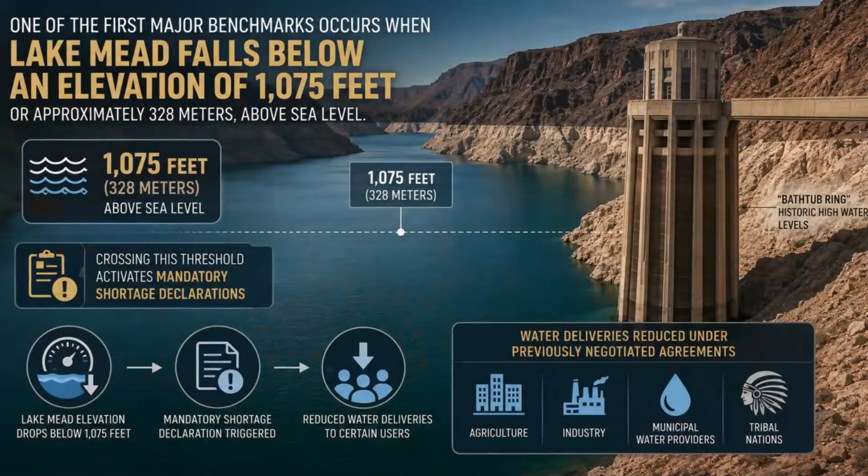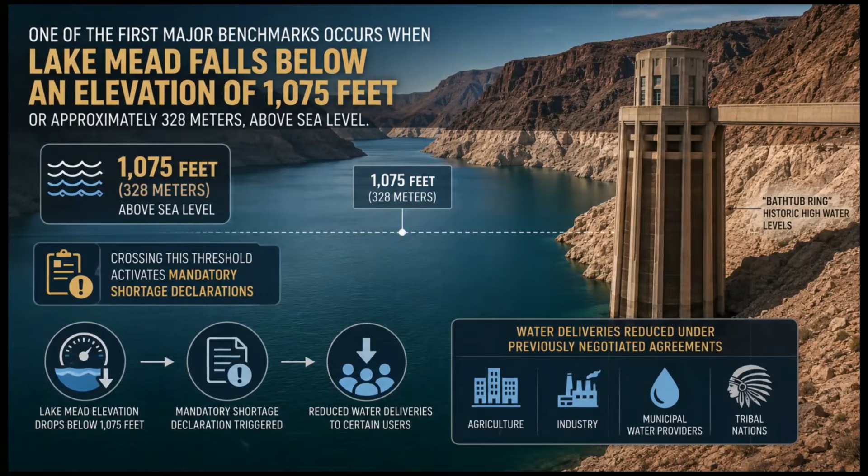Lake Mead's management revolves around specific water elevations that trigger increasingly significant operational changes. These thresholds determine when mandatory conservation measures begin, when hydroelectric production becomes less efficient, and when increasingly serious emergency planning must be implemented. One of the first major benchmarks occurs when Lake Mead falls below an elevation of 1,075 feet, or approximately 328 meters, above sea level. Crossing this threshold activates mandatory shortage declarations that reduce water deliveries to certain users under previously negotiated agreements.

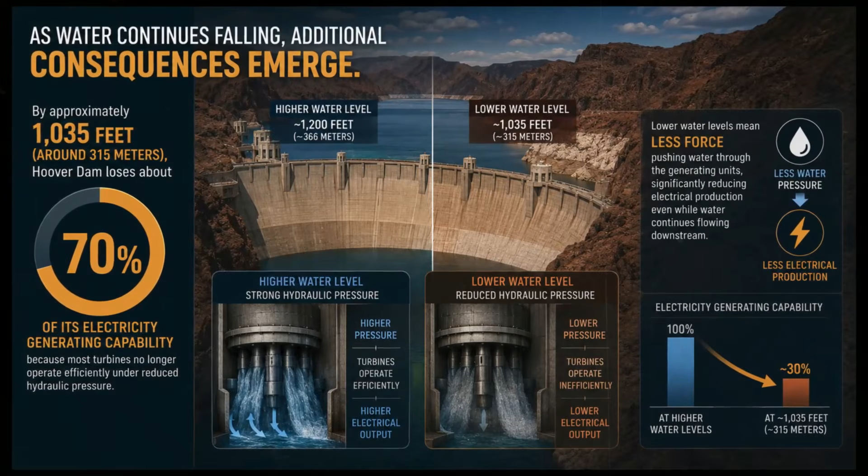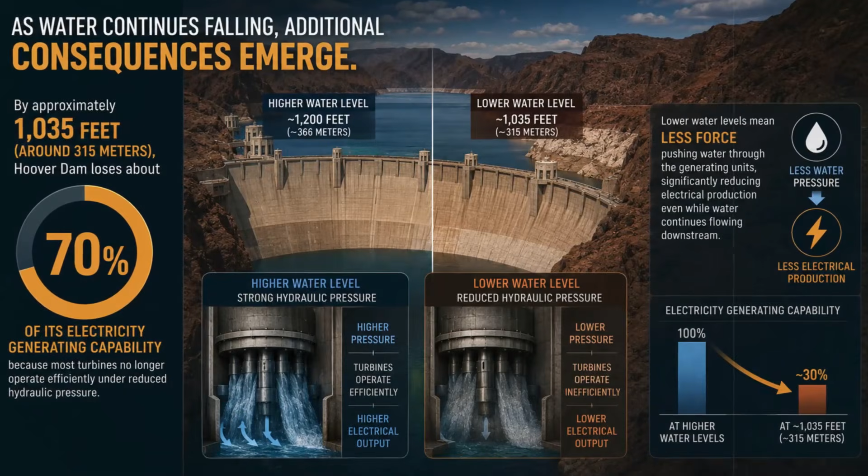As water continues falling, additional consequences emerge. By approximately 1,035 feet, or around 315 meters, Hoover Dam loses about 70% of its electricity generating capability because most turbines no longer operate efficiently under reduced hydraulic pressure. Lower water levels mean less force pushing water through the generating units, significantly reducing electrical production even while water continues flowing downstream. If the reservoir reaches approximately 950 feet, or nearly 290 meters, hydroelectric generation effectively stops. Water could still pass through the dam, but the turbines would no longer function as intended.

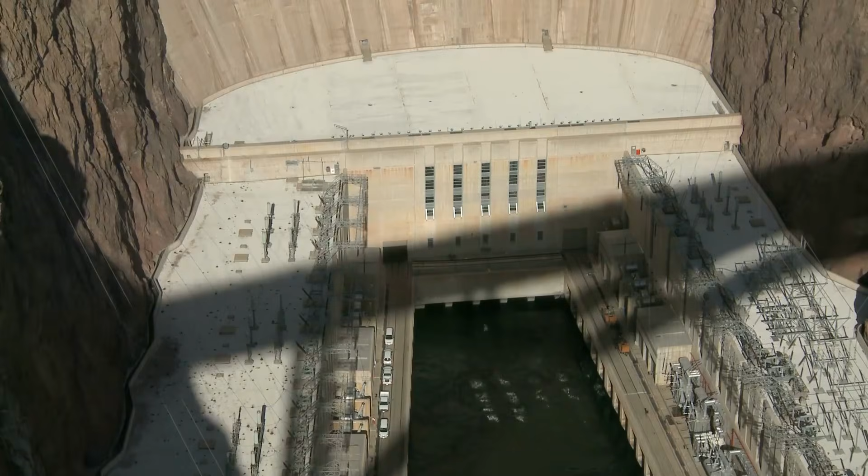An even more consequential threshold lies farther below. Dead pool occurs at approximately 895 feet, or about 273 meters, above sea level. At that elevation, water can no longer flow through Hoover Dam by gravity alone. Downstream deliveries supporting cities, farms, tribal communities, and Mexico would effectively cease unless alternative pumping systems existed. Dead pool represents one of the most closely monitored elevations in American water management because reaching it would fundamentally alter operations throughout the lower Colorado River basin. Although Lake Mead remains above that level today, recent projections illustrate why concern continues growing.

The year 2026 brought another disappointing snow season across the Rocky Mountains, where much of the Colorado River originates. Snowpack serves as the natural reservoir feeding rivers throughout spring and summer. When winter snowfall falls well below average, downstream reservoirs receive substantially less runoff during the following months. Federal water managers responded by reducing releases from Lake Powell into Lake Mead by approximately 1.48 million acre-feet. The decision aimed to preserve sufficient water behind Glen Canyon Dam, preventing equally serious operational problems farther upstream. Protecting one reservoir, however, inevitably affected the other. With reduced inflows arriving from Lake Powell, Lake Mead faced accelerated declines despite ongoing conservation efforts across multiple states.

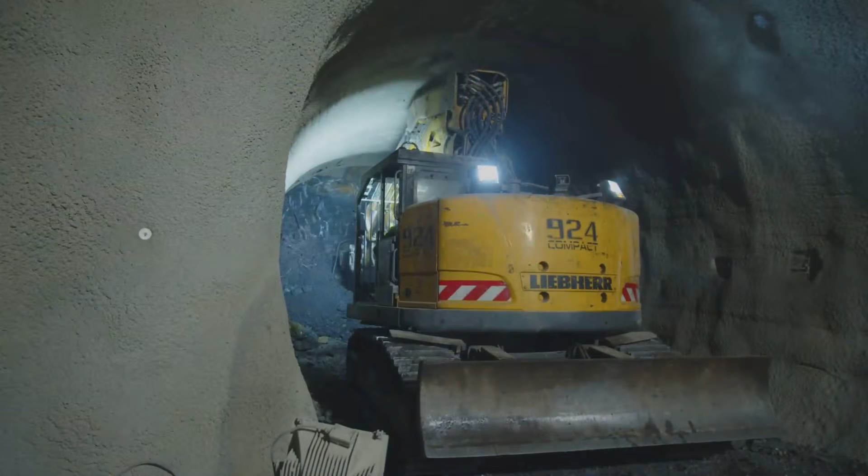For southern Nevada, they also became a direct engineering problem, requiring a solution long before the reservoir approached its lowest operating levels. Rather than waiting until water shortages became an immediate emergency, the region began preparing for conditions that once seemed almost unimaginable. The result was one of the most ambitious water infrastructure projects ever constructed beneath an existing reservoir, a project costing approximately $1.5 billion that was designed for a future in which Lake Mead continues to shrink.

Unlike many other cities drawing water from the Colorado River, Las Vegas relies on a relatively small allocation of the river's total supply. Yet nearly all of southern Nevada's drinking water comes from Lake Mead. As reservoir levels continued declining after the beginning of the 21st century, engineers recognized that the existing intake structures, which had functioned reliably for decades, were becoming increasingly vulnerable.

Water does not simply enter a city's treatment system through a pipe placed anywhere along the shoreline. Intake structures are carefully positioned at specific elevations beneath the lake so they remain submerged under expected operating conditions. As Lake Mead fell year after year, the highest intake structures gradually became exposed or approached elevations where reliable operation could no longer be guaranteed.

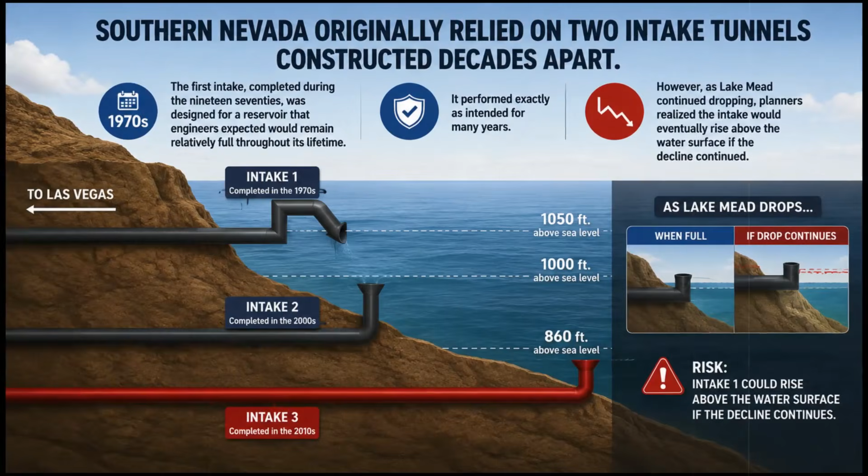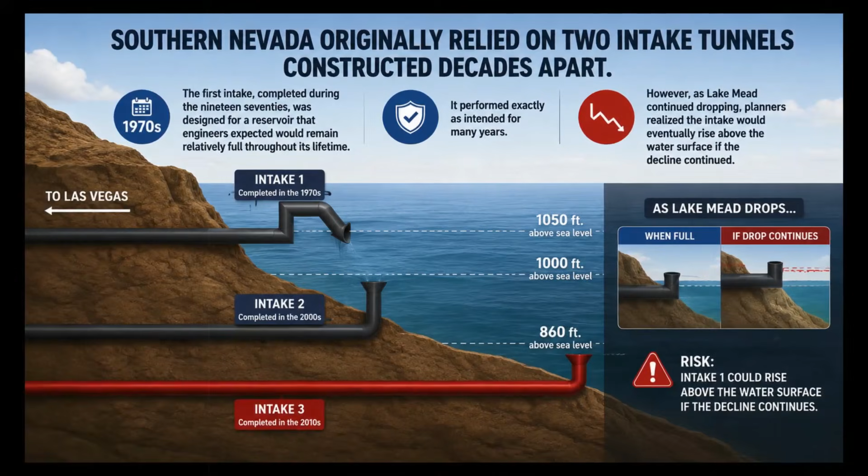Southern Nevada originally relied on two intake tunnels constructed decades apart. The first intake, completed during the 1970s, was designed for a reservoir that engineers expected would remain relatively full throughout its lifetime. It performed exactly as intended for many years. However, as Lake Mead continued dropping, planners realized the intake would eventually rise above the water surface if the decline continued. A second intake was later constructed at a lower elevation to provide additional security. While it significantly improved reliability, projections showed that prolonged drought could eventually threaten that intake as well.

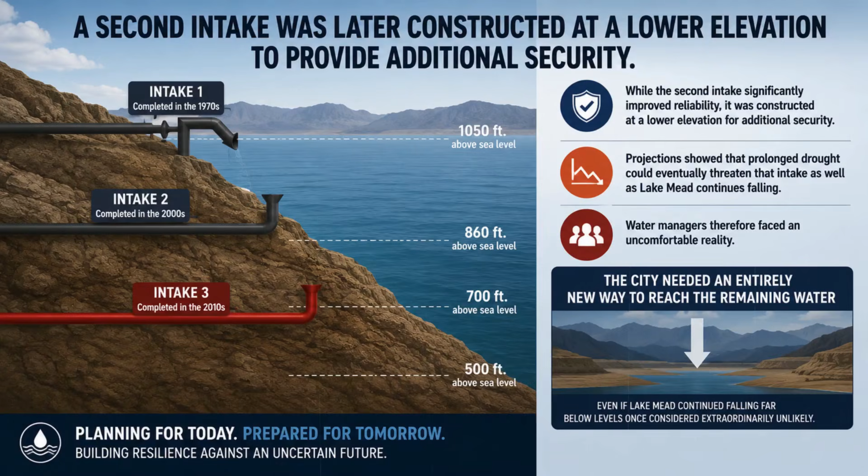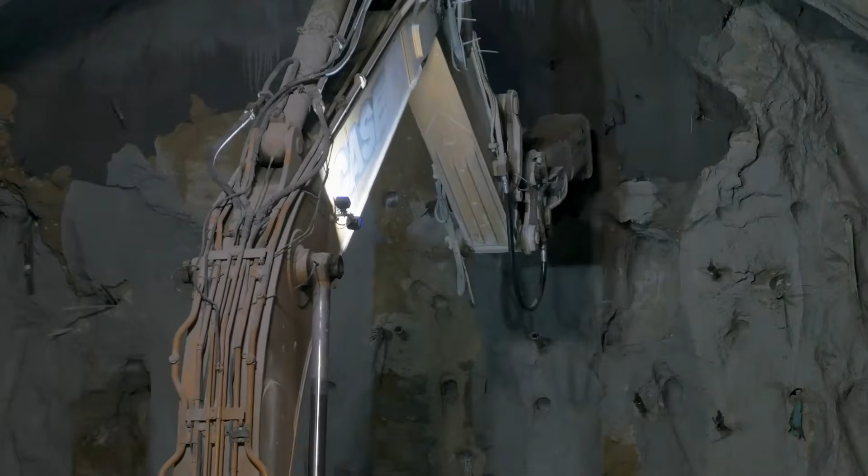Water managers therefore faced an uncomfortable reality. The city needed an entirely new way to reach the remaining water, even if Lake Mead continued falling far below levels once considered extraordinarily unlikely. The solution would require going deeper than any previous intake tunnel ever built at the reservoir. Planning alone demanded years of geological surveys, underwater mapping, drilling investigations, and structural analysis.

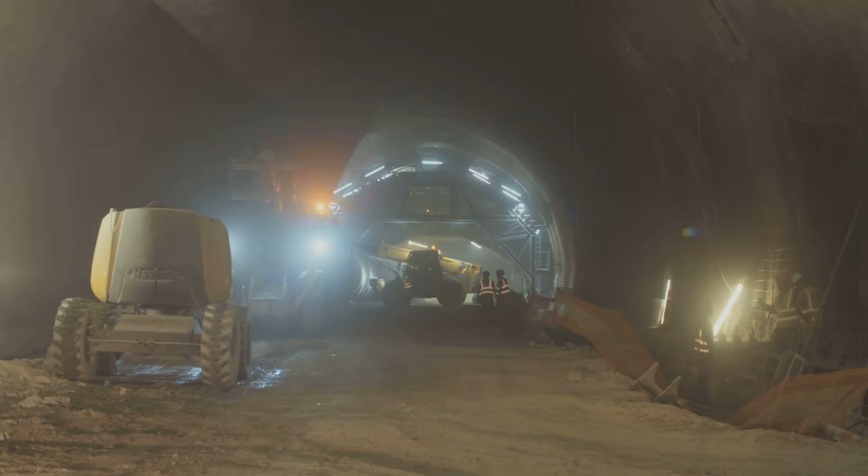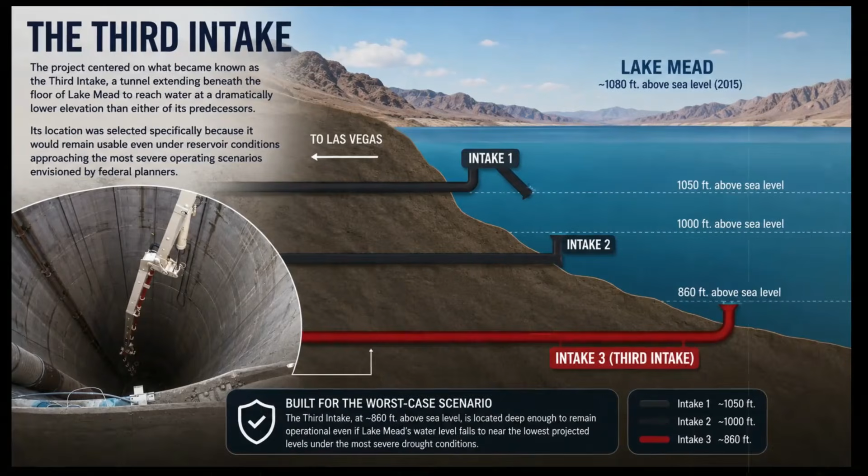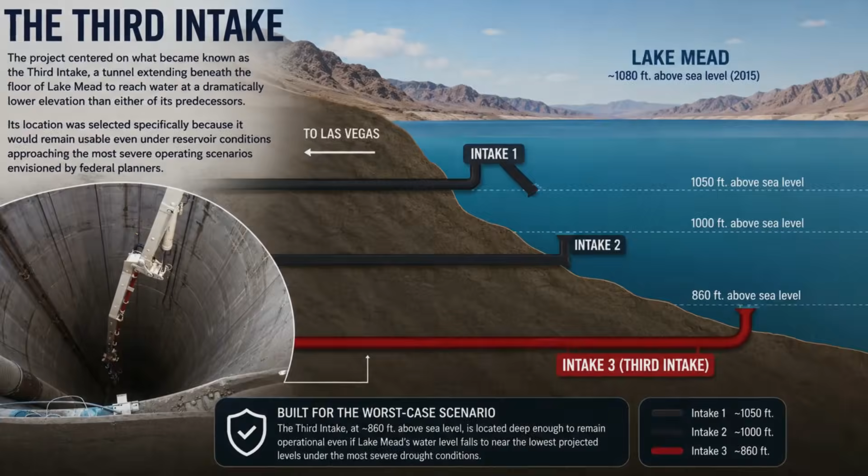Engineers were not simply installing another pipeline. They were attempting to excavate beneath one of the largest reservoirs in the United States while maintaining the integrity of Hoover Dam's surrounding geology and ensuring the existing water supply remained uninterrupted throughout construction. The project centered on what became known as the third intake, a tunnel extending beneath the floor of Lake Mead to reach water at a dramatically lower elevation than either of its predecessors. Its location was selected specifically because it would remain usable even under reservoir conditions, approaching the most severe operating scenarios envisioned by federal planners. Constructing that tunnel presented challenges unlike conventional underground excavation.

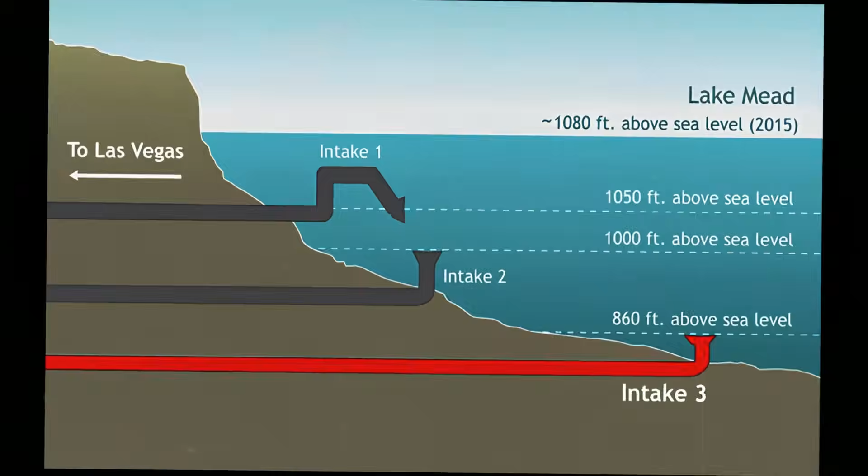Unlike tunnels driven through dry mountainsides, this one had to be excavated beneath an active reservoir containing millions of acre-feet of water, exerting enormous pressure on the surrounding rock. Any significant failure during excavation could have allowed water to enter the tunnel under tremendous force, placing workers and equipment at immediate risk. Engineers therefore relied upon one of the world's largest tunnel boring machines ever assembled for a municipal water project.

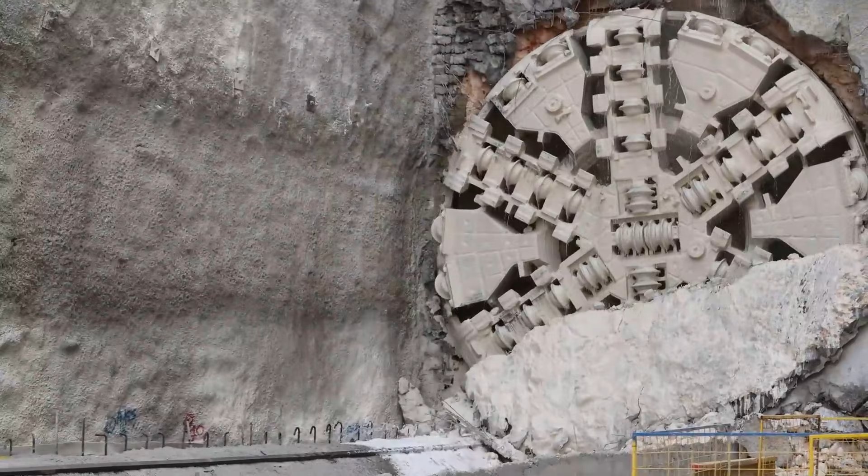The massive machine slowly advanced through extremely hard volcanic rock beneath the reservoir, cutting a circular path while simultaneously installing concrete lining segments behind it. Every forward movement required extraordinary precision because even small alignment errors could affect the tunnel's ability to connect with its final intake location.

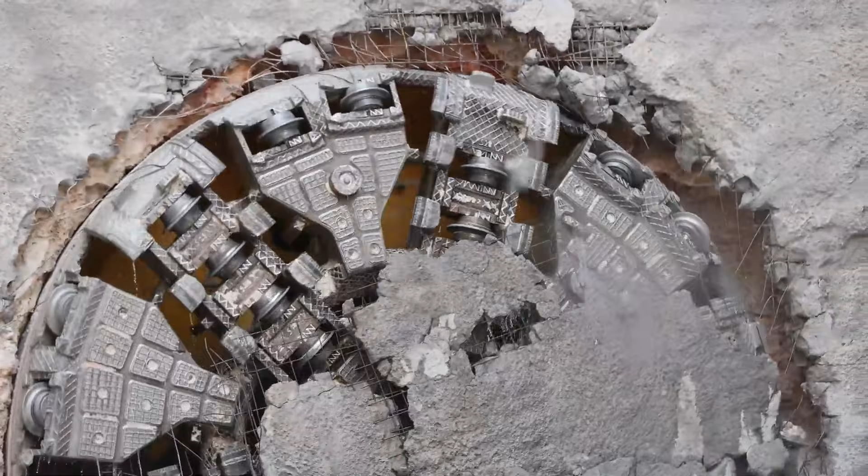The boring machine itself became an engineering achievement. Measuring hundreds of feet in overall operating length and weighing thousands of tons, it functioned as a mobile underground factory. Rotating cutter heads fractured solid rock, while conveyor systems removed excavated material. Hydraulic systems supported the surrounding tunnel walls until permanent concrete segments locked together into a finished structure capable of withstanding immense external pressure. Progress remained deliberately slow.

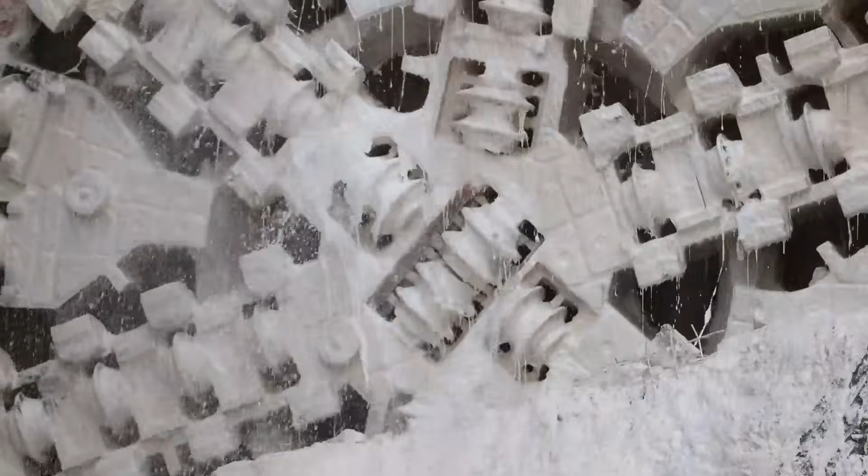Every section required constant monitoring for rock stability, groundwater intrusion, equipment performance, and alignment accuracy. Engineers continuously measured the tunnel's position to ensure it remained exactly where design specifications required. Unlike surface construction, underground corrections become increasingly difficult once excavation advances. Conditions beneath Lake Mead added another layer of complexity. The surrounding geology included fractured volcanic formations, varying rock strengths, and zones requiring different excavation techniques. Construction crews adapted continuously as the boring machine encountered changing geological conditions along its route.

Perhaps the most technically demanding portion of the project came at the intake itself. Instead of draining the reservoir to build the connection, engineers developed methods allowing the intake structure to be completed while remaining beneath deep water. Specialized techniques isolated critical construction areas despite the surrounding hydraulic pressure. The operation required careful sequencing because mistakes could have jeopardized years of work already completed underground.

The completed intake reaches water at approximately 875 feet, or about 267 meters above sea level. That number carries enormous significance. Federal planners define dead pool at roughly 895 feet, or approximately 273 meters. Below that elevation, water can no longer move through Hoover Dam using gravity alone. In practical terms, downstream deliveries through the dam would effectively stop because the reservoir surface would no longer stand high enough to push water through the existing outlet system.

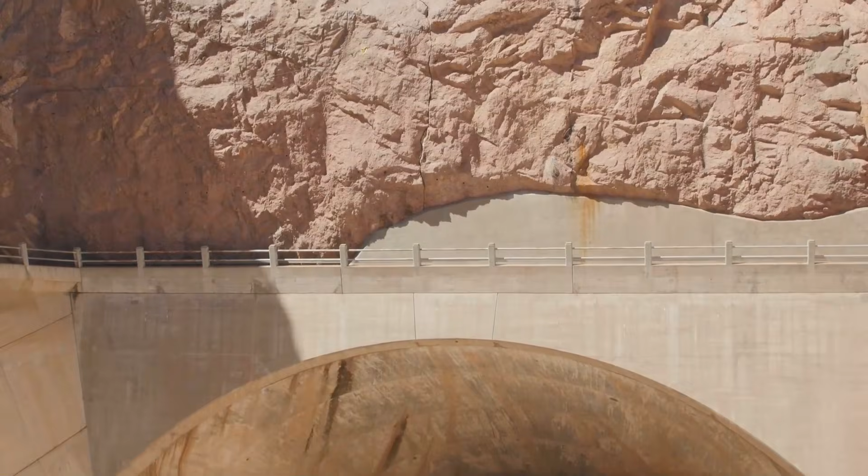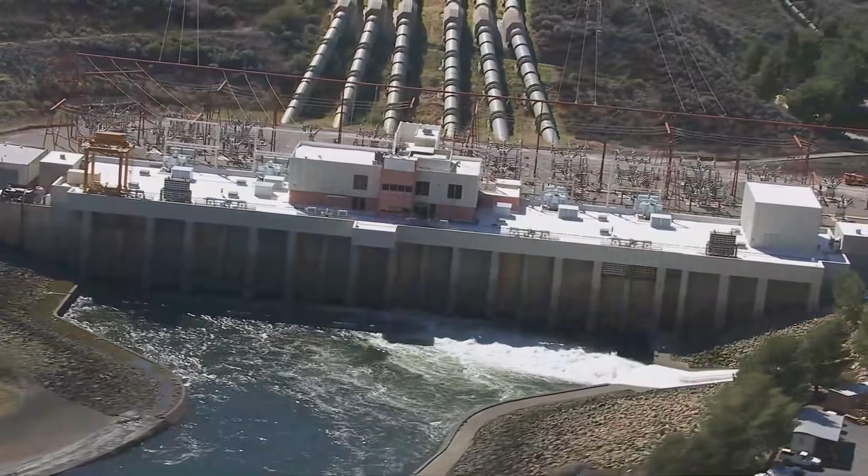That capability alone, however, would accomplish little without another equally important piece of infrastructure. As reservoir elevations continue declining, lower water levels reduce the natural pressure available to move water uphill toward treatment facilities. Engineers therefore paired the third intake with a low lake level pumping station, another massive construction effort designed specifically for extreme reservoir conditions. The pumping station contains enormous vertical pumps capable of lifting water from the deep intake tunnel into southern Nevada's treatment and distribution network.

Each pump was designed to operate under conditions far outside those anticipated when Hoover Dam and the original intake systems were built. The scale of the facility reflects the importance of its mission. The pumping equipment is capable of moving hundreds of millions of gallons of water each day, ensuring that municipal supplies remain available even if reservoir elevations continue approaching historically unprecedented lows.

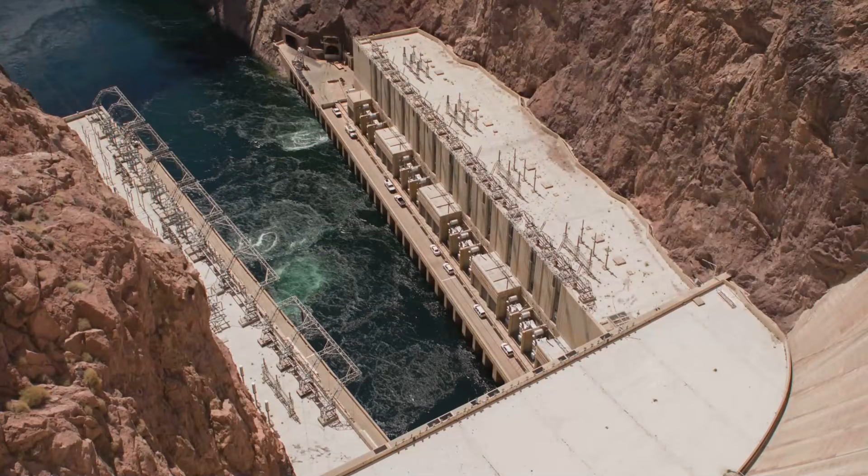Viewed together, the third intake and the low lake level pumping station represent far more than replacement infrastructure. They effectively redesigned the region's water access system around the assumption that Lake Mead may never return permanently to the elevations common during much of the 20th century. The investment also reflects a broader shift in long-term planning across the Southwest. Earlier generations designed reservoirs around historical river conditions that appeared dependable. Modern engineers increasingly design infrastructure capable of functioning under scenarios once treated as remote possibilities.

Southern Nevada reinforced that engineering investment with aggressive conservation efforts. Despite adding more than 800,000 residents over recent decades, the region reduced per capita water use by approximately 55%. Decorative grass covering roughly 250 million square feet, or approximately 23 million square meters, has been removed, saving an estimated 203 billion gallons, or nearly 768 billion liters of water.

Indoor water conservation became equally important. Nearly all water used inside homes and businesses is collected, treated, and returned to Lake Mead, allowing southern Nevada to receive return flow credits under Colorado River accounting rules. Water used outdoors, by contrast, generally does not return because it evaporates or is absorbed into landscaping. These combined measures mean Las Vegas consumes substantially less Colorado River water today than its population growth alone would suggest. Conservation has slowed demand growth, while engineering has protected physical access to the remaining supply.

Elsewhere, efforts are also underway to preserve another critical function of Hoover Dam. The Bureau of Reclamation has begun installing new, wide head turbines capable of generating electricity under lower reservoir conditions than the original equipment. These upgraded turbines are intended to continue producing hydropower down to approximately 950 feet, or around 290 meters, extending electrical generation during periods when older turbines would become increasingly ineffective. Like the third intake, however, the upgraded turbines do not create additional water. They merely allow existing infrastructure to continue operating under more difficult conditions.

That distinction remains central to the broader Colorado River crisis. Engineering can extend operational limits. It can maintain access to lower water levels. It can improve pumping efficiency, modernize turbines, strengthen infrastructure, and provide additional flexibility during prolonged drought. Engineering cannot increase snowfall across the Rocky Mountains. Engineering cannot reverse evaporation intensified by higher temperatures. Engineering cannot permanently compensate for a river that consistently delivers less water than legal agreements allocate.

Agriculture still accounts for roughly 70% of all Colorado River water use. Urban conservation has achieved remarkable reductions in several metropolitan areas, yet municipal savings alone cannot eliminate the structural imbalance between supply and demand. The river continues producing substantially less water than 20th century allocation agreements anticipated. Negotiations among the 7 basin states therefore remain as important as any construction project. Existing operating guidelines expire at the end of 2026, yet long-term agreements balancing shrinking supplies against competing demands remain unresolved.